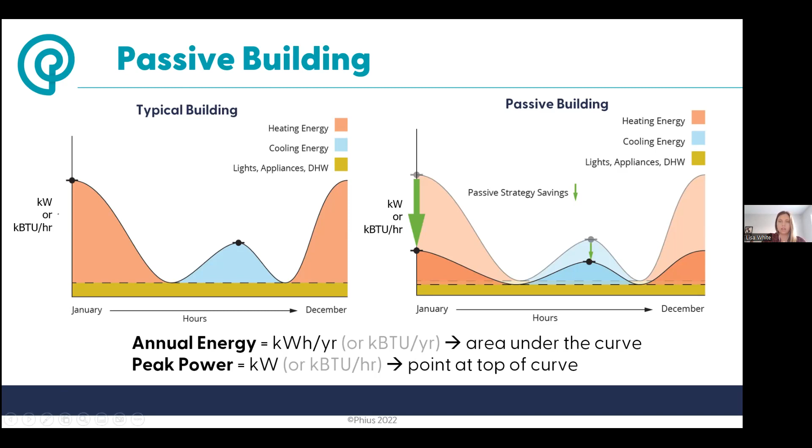So I understand there might be some utility people on, but most of us don't think about where our power comes from. We flip a light switch on and the power's there. And then if it goes out due to a storm or something, that's when we start thinking more about what is on the other end of that meter. So we're gonna start by talking a little bit about the grid and the current operation of the grid, where that's going, and then how buildings fit into this.

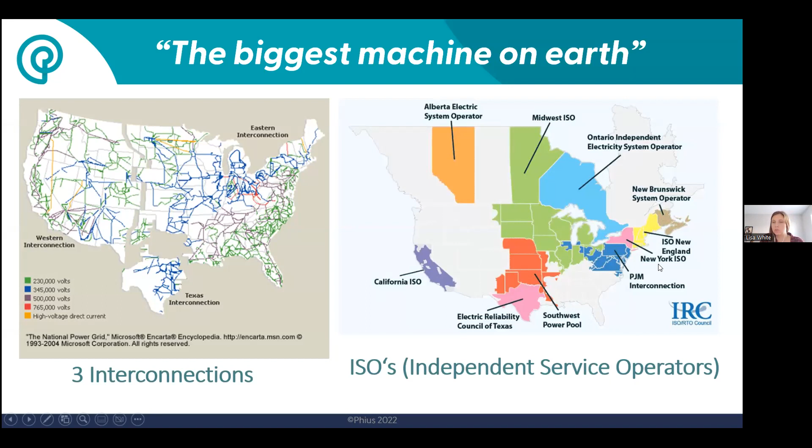So the grid, someone coined it to be the biggest machine on Earth. There's 3 different interconnects: the West, East, and Texas. They're not connected. They operate at the same frequency, but slightly off from one another. And different regions of the grid are operated by different ISOs, or independent system operators, or there's another name for some of the other regions that aren't ISOs. So up in Vermont, you guys are ISO New England.

It's a really complex process what's going on with the utility grid, but I think a lot of it's actually fairly antiquated in the way that it's working relative to the technology that we have today. So at a high level, the current electric grid infrastructure is you have generation, high voltage transmission, lower voltage distribution, and then a customer load at the other end. And it's unidirectional power flow, from generation to load.

And if the customer load increases, the power generation must also increase. This is just how it goes. The generation must be built in order to meet the customer load. They must have enough capacity, and it must be able to respond to continually supply power to these buildings.

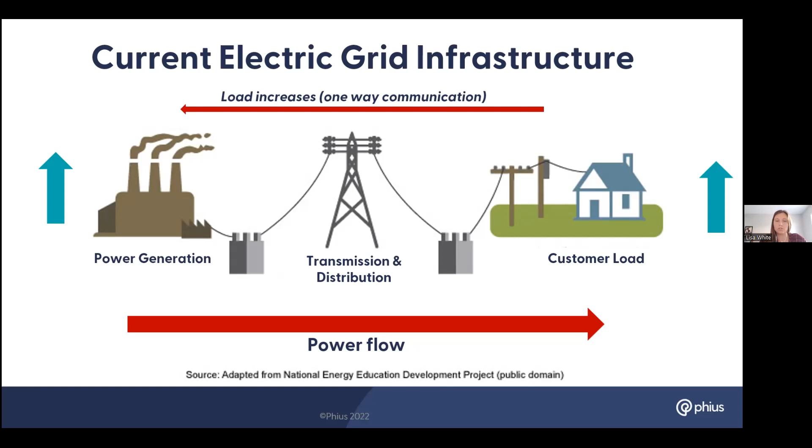And in terms of resources that we have on the grid, nationwide, we have about 35% natural gas as a fuel to create electricity, 23% coal, 20% nuclear, 15% renewables, and 7% hydropower. And we know that renewables will be the fastest growing source of electricity generation, or we hope, at least we at Phius hope, for greater decarbonization.

And the loads that the grid sees are fairly predictable. The load that the different ISOs, or really eGRID regions, need to balance are fairly predictable. So in winter, there's a base load, there's an intermediate load, kind of when the day starts, and then a peaking load, which in winter is just heating up buildings in the morning, and then that late afternoon, evening peak. And then in the summer, you have, again, a base load, an intermediate load, and then one peak in the middle of the day. And these loads are met with different types of resources, different generation resources.

So coal and nuclear and maybe some renewables are used to meet baseload. This is mostly because these resources are constrained to constant output. So it wants to be set and say, I'm delivering this amount of power and I cannot change that. Intermediate load is met by what is called load following resources. So some natural gas combined cycle, maybe some renewables. So when that load increases, that resource is increased to follow that load, right?

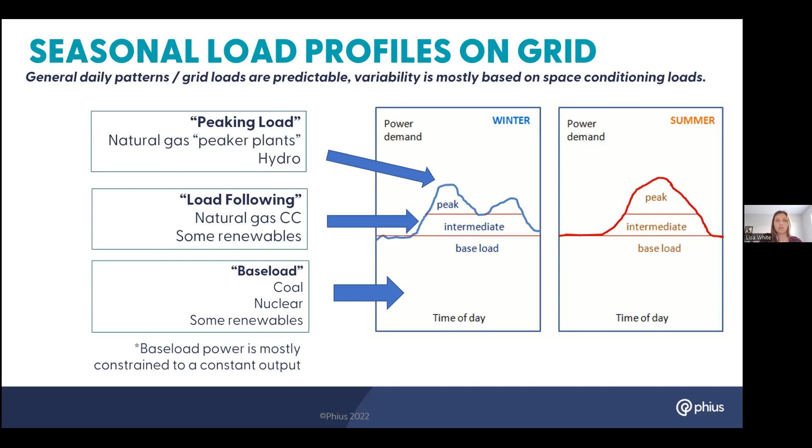And in terms of the capacity that we have in the US grid right now, there's about 2.5 to 3 times more generation capacity than what's used annually. And what that really means is if everything we had ran all out all the time, it would generate 2.5 to 3 times more energy than we actually need over the course of the year. And that's because of this peak. So the system has to be sized to meet that peak at that critical moment.

And with building design, I assume many on this call are related to building design or operation. We kind of understand this from the point of, let's say, a heating system size. You calculate a peak heat load based on one critical climate condition during the year, and then you also add some redundancy on top of that to make sure that load is met. But this is happening at the scale of the utility grid to make sure that peak load of the grid can be met.

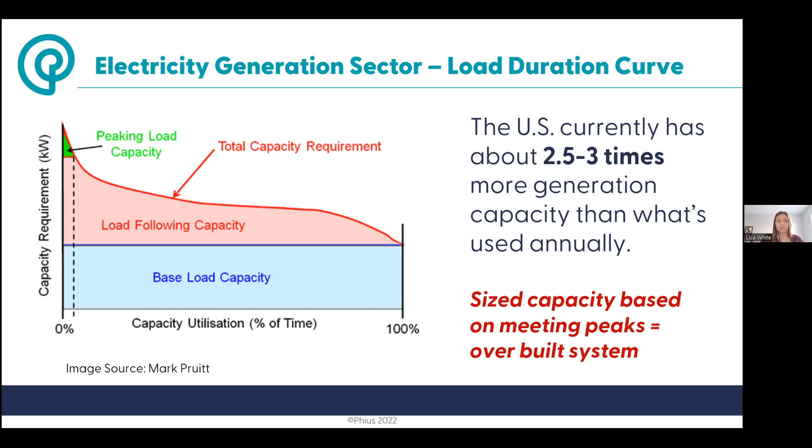And as the grid load increases over the course of the day, more and more expensive resources must be called upon, because the generation resources essentially bid into the power market at a certain price. So you start with the lowest cost and then increase over time. So that last kilowatt, or megawatt in this case, of power is the most expensive one.

And another way to look at this is on the right chart here, as the demand increases, as this vertical line goes to the right, the market price increases, the horizontal line. And it's not linear, right? After a certain point, that next resource might be more expensive. And that's when you get into these peaking plants and these really expensive resources that happen when the demand is really high.

And utility pricing, generally we see most residential customers see flat rate pricing. It's more of like an insurance policy almost, that you're not subject to the vulnerability of the actual cost of the market electricity. But real-time pricing is actually variable. As I'm sure many on this call understand, the actual pricing to deliver electricity at any moment is variable, though most consumers are paying a flat rate for it.

There are, I should say, a fair amount of markets that use time of use rates, or even in Chicago, you could say, I want to use the real-time pricing, but generally we see flat rates.

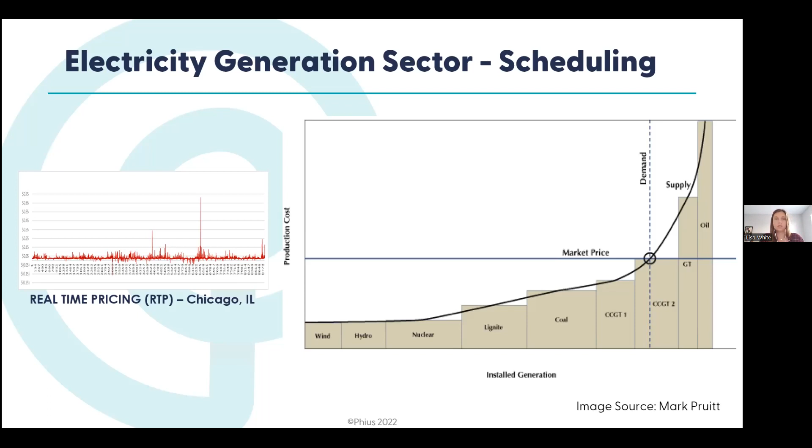And because every hour, every moment, the electricity being delivered to a certain region or a certain building is a different mix of generation resources, there's a different marginal carbon emissions associated with that, which means that next kilowatt hour delivered has a different emissions rate than a different hour, because it's a different grid mix, right? It's a different mix of resources, and every resource has its own carbon emissions associated with it.

But even with Phius, for those that are familiar, we just say every hour is the same. When we talk about energy, we look at annual energy, we multiply by a static source energy factor, and every hour is the same.

And if you look at what Phius is using right now for the 2050 grid electricity source energy factor, we're using 1.8, which is the average right here in the middle of the line. Whereas this is actually what the projected hourly source energy factor is for 2050, that kind of squiggly line across. So it's quite variable throughout the year, although again, a lot of our accounting methods look at a single flat rate.

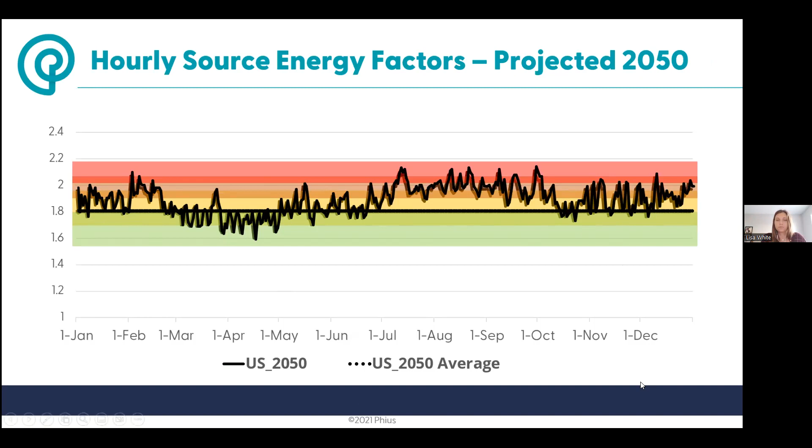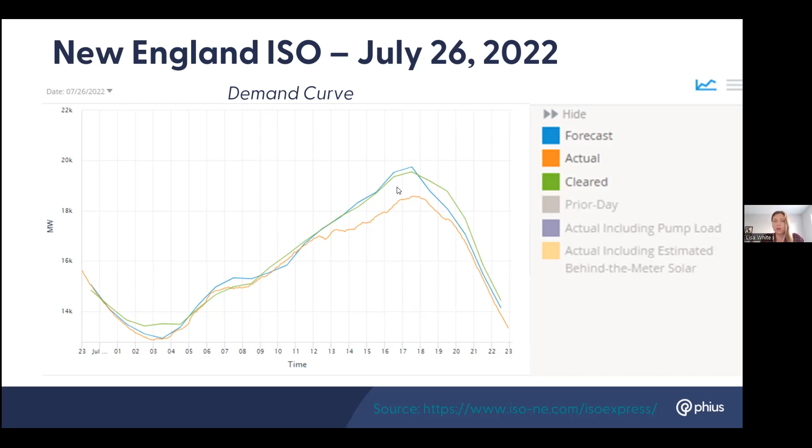And you can see the forecasted rate, the actual rate, and what cleared the market. This is a summer day, so you have the afternoon peak.

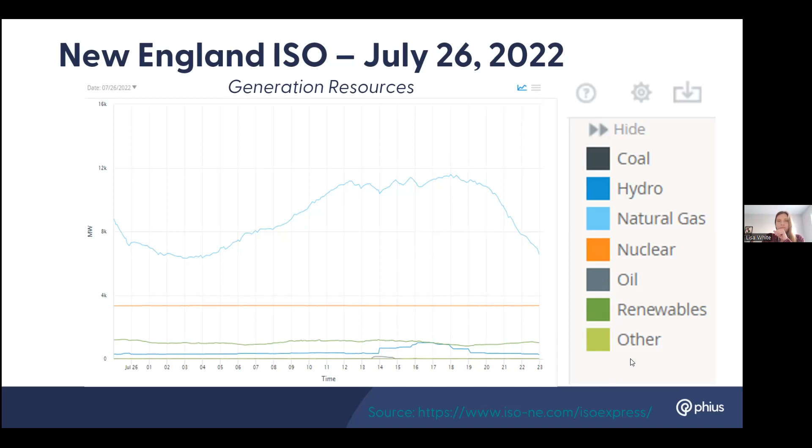So it's offsetting the energy use of this building. So the grid never actually saw that load. So they're estimating, but because it's behind the meter, there's no actual exchange of data with the utility to understand what that load was.

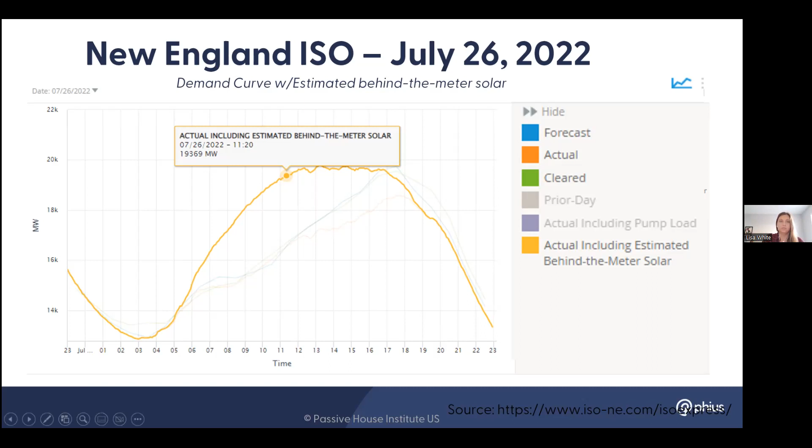And then digitalization. So the technology that we've experienced in the past couple of decades is being applied now to the electric grid, whereas the electric grid in many areas hasn't been updated in quite a while.

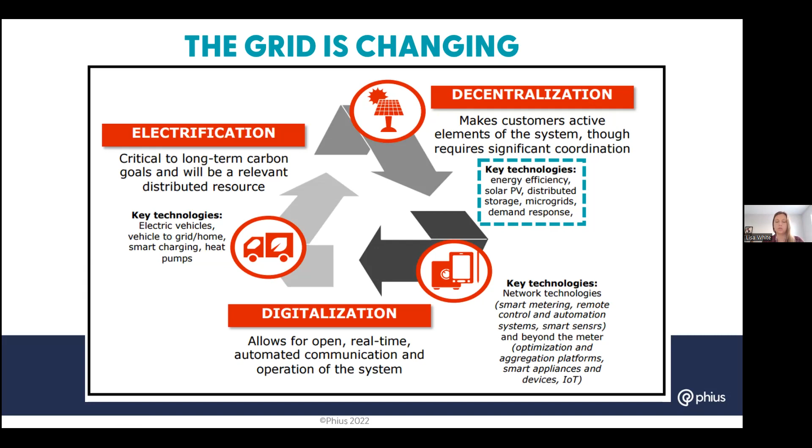And probably 10 years ago the duck curve came out, where it talks about the ramp, which I'll show. But this is happening day after day, where the ramping period, either ramping down or ramping up for the grid, is a challenge due to the limitation of the resources that are available to meet that load, whether it's ramping up to increase power output, or ramping down to turn down those resources.

The other big challenge that's happening is the transmission lines aren't upgraded quite sufficiently to carry the load. So if you have a central solar PV system, there's congestion on the lines.

There is a question, Lisa, if you want to answer it, from Andy: what is the shaded area on the last graph?

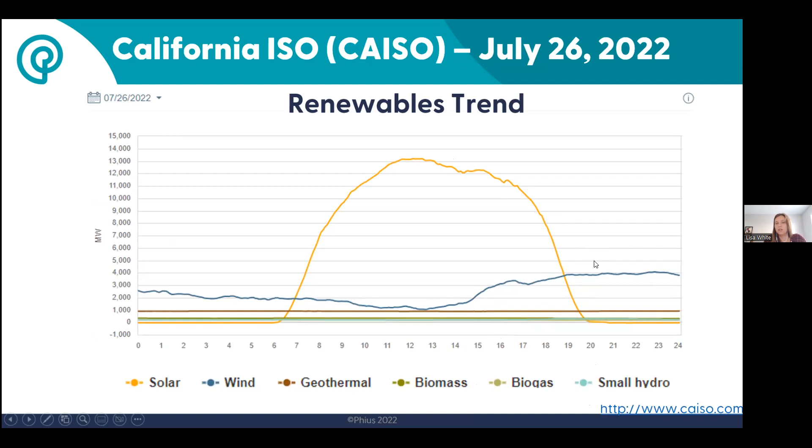Lisa is fighting a very bad cold. I'm sorry, I haven't tried to talk this long yet. So I wasn't quite sure. Just do whatever you can, no problem. Don't worry about it. No, it's no problem. I'll just keep muting if it's okay.

And then the other curtailment that's happening is due to mitigating system-wide oversupply. So there's a lot of excess energy being produced during those times. So it must be curtailed because it can't be used. It either can't get brought to the customer or it can't be used. So when you see negative electricity prices, this is one reason this occurs.

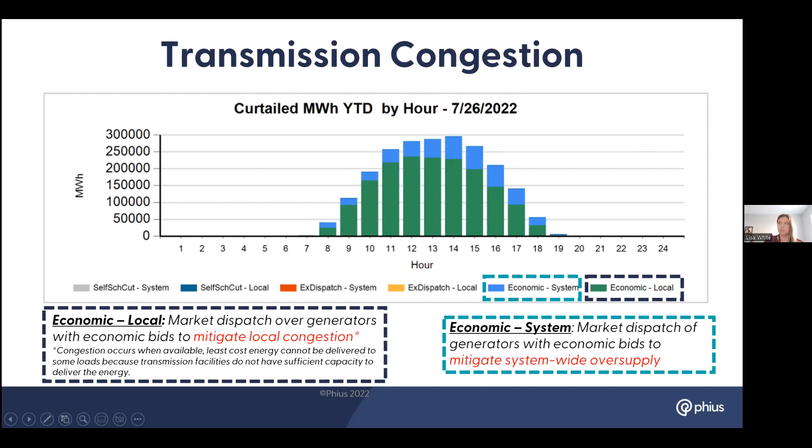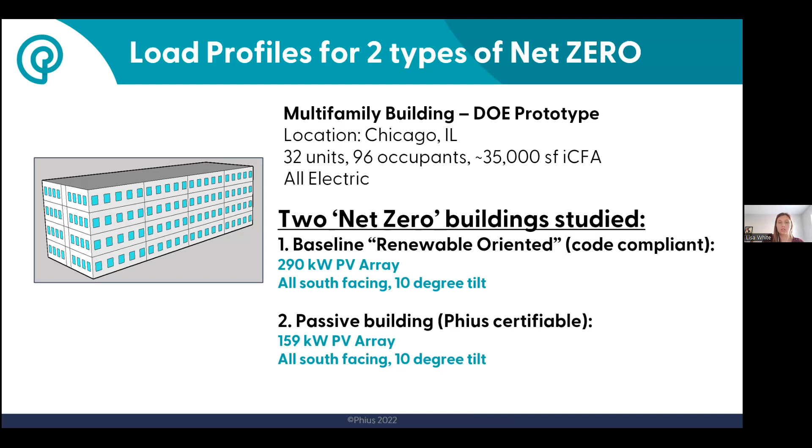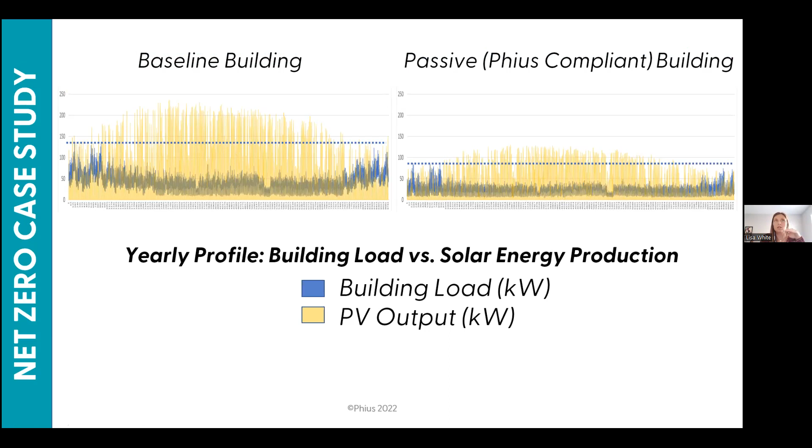And then if you look at ultimately the peak of that building, or what the grid capacity would be required for that building, you're looking at maybe around 130 kilowatts for the baseline versus maybe 80 for the Phius building. So remember, the peak defines the capacity, or ultimately the maximum power output of the generation needed to serve the building.

If you were to look at this in one other way, kind of spinning it around this chart, January to December, we're saying this building load of the baseline building is being offset by this yellow load. So the blue lines are being offset by the yellow. And same with the passive building, a little bit smaller of a blue, more condensed, lower loads, a little bit smaller yellow, right? But they're not identical.

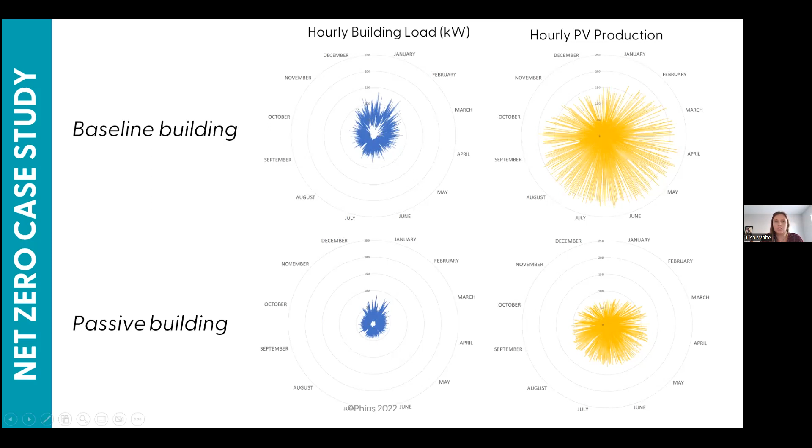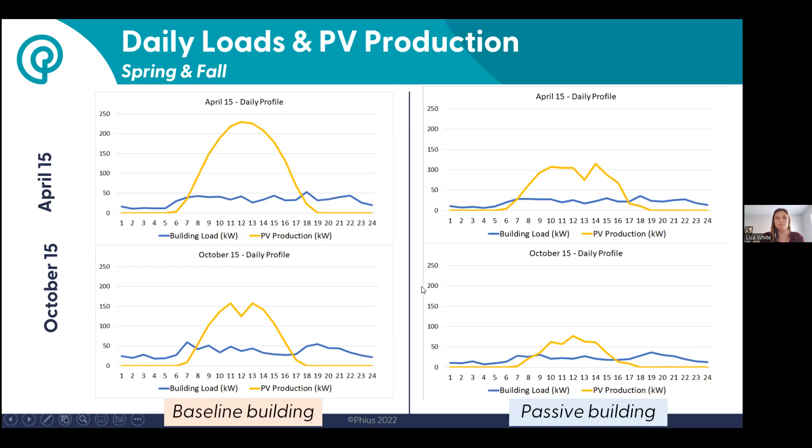So the mismatch between the two load profiles is lower because just less energy was used in the building, so less energy had to be produced to offset it over the course of the year. In the same case along the bottom in October. So what do we get out of that, right?

So just understanding that net zero buildings that rely solely on PV to offset their annual energy use, whether it's passive or not, you still need grid support when the sun's not out. That's basically it. Without energy storage, you still need grid support. So net zero is a great goal, but it's not the end goal. There's more that we can do. But still, if you consider the passive case, only half of the reliability from the grid had to be provided because it used half of the amount of energy.

So just thinking about the concept of net zero, it addresses how much. It's this amount of energy over a certain amount of time used and produced. Really, the total end metric could be net zero over an hourly or a minute basis, and maybe that accounting could be more correct. But right now we use annual. And on its own, that doesn't address two key concepts that help further reduce operational emissions and facilitate more renewable resources or grid decarbonization.

So that's really the goal of the Phius+ program, is to further reduce operational emissions, right, and allow for more renewable resources. So these other two key concepts are low loads. That's not baked into net zero, but it is baked into the Phius program. So if you start with Phius Core, Phius+, low peak loads taken care of, right? And that, again, helps further reduce operational emissions because we're keeping the peak down and facilitates more grid decarbonization. But it doesn't address timing of energy use.

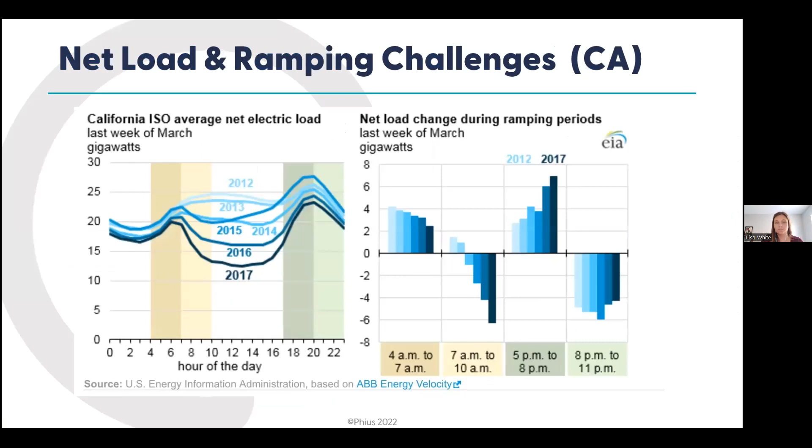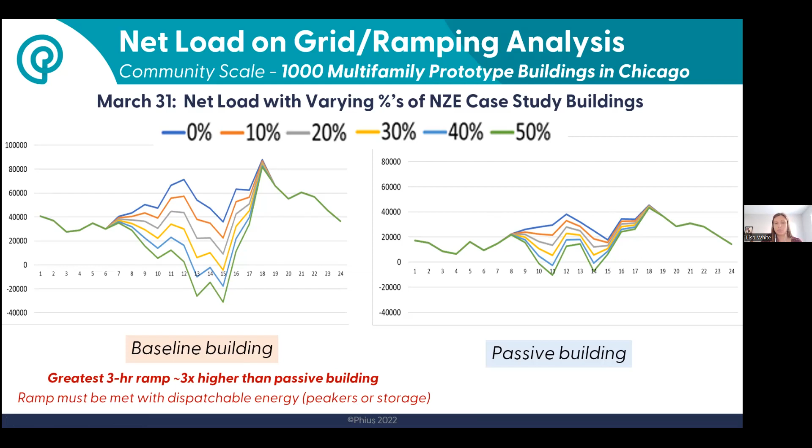So in the baseline building, you can see there's significantly more ramp, right? Because more PV was needed on an annual basis to get to net zero. And the loads in the building weren't quite as smooth or as flattened. So the passive building has a ramp that's 3 times less intense than the baseline building. Remember, this is the same size building, same climate, serving the same number of people, just with different design strategies. First, the passive building reduced peaks in total energy consumption by about 50%. And that alone helped minimize that ramp. So the passive buildings dampen that issue, but they don't fully eliminate it, right?

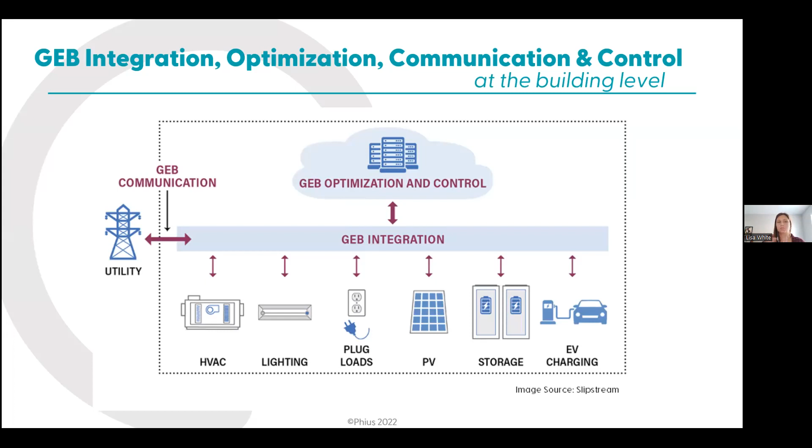So just a quick look at how this might work, a kind of schematic here. So the utility might have control over this grid interactive building in terms of some of the loads in the building, but they'd be defined through an optimization and control system. So the HVAC loads maybe could fluctuate, maybe lighting could dim, plug loads, maybe there's some critical versus non-critical, PV storage, when is it best to store versus dispatch power to the grid, and when is it best to EV charge, right? So trying to optimize this based on communication with the utility and the grid stress at that time.

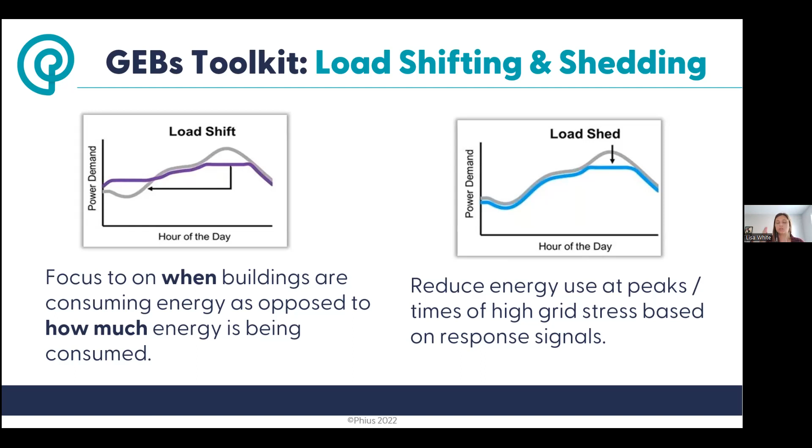And then load shedding is reducing energy at the peak. So this is just a load that doesn't have to happen and the building can shed it, or also demand response. And this is based on a grid signal or that peak happening at that time of day. So for this, I generally think of space conditioning loads or thermostat set points or lighting dimming, things like that.

So if we were to look at the grid scenario we looked at before, but look at it with GEB, grid interactive efficient buildings, and look at a time of high grid stress. So we still have the power flow happening from one end to the GEB customer load. The grid stress is high, so it sends a signal to the customer to reduce the load, and that's demand response. The customer can reduce the load, and then either the utility wouldn't have to go up to that next peaking plant, or that next generation resource, or the cost would just be reduced for the customer, right? The electricity price is about to get very high. It's best if you can reduce your load at the time. That's demand response.

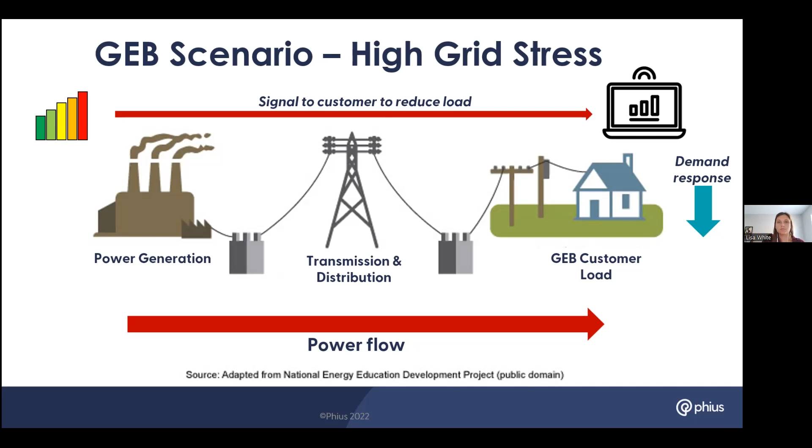The other scenario on the other side of the coin is if there's low grid emissions. So at that time I was talking about in California, high renewable penetration, let's assume there's enough transmission to get it to the customer. So there's power flow again going from the clean energy to the customer load, and the grid stress is low, but there's abundant renewable energy. So maybe the customer should actually increase their load right now if they want to: cheaper energy, lower emissions energy. And so maybe the demand response happens the other way.

Maybe the building is preconditioned. So maybe your space conditioning, say you're home in Vermont, happens in the morning, or overnight, whenever the renewable resource is available, or in the middle of the day, so that you can offset some of the heating needed later in the day. Or maybe you're charging your EV, something that can happen at any time, really, based on the signal from the grid. So you can either take on more power at certain times or shed more at other times.

And there's a big synergy between this grid interactive building concept and passive building. So passive building is kind of like the Yeti of buildings. If you think about the thermal enclosure, I don't know if anyone has a Yeti coffee cup or cooler, but it's amazing how long it can keep coffee warm or keep ice not melted. So the passive building is very resilient to changes in exterior temperatures.

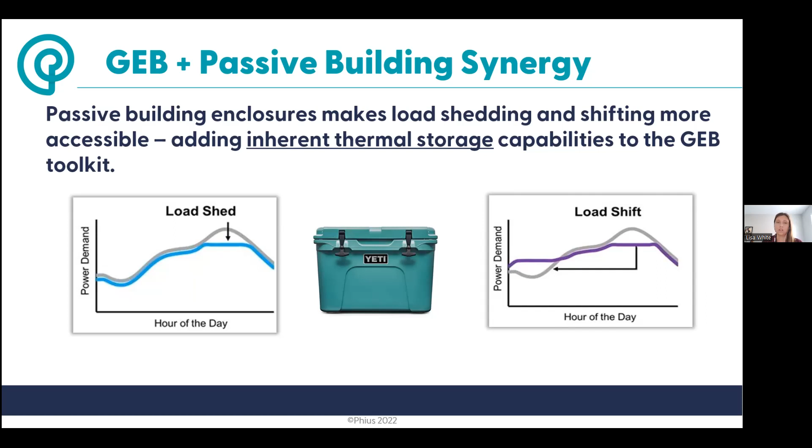And when we think about renewables in the future grid, I think a lot of people understand that storage is going to be a key part of it. But I think it's often ignored that buildings themselves can be thermal storage capacitors. We often think about large scale batteries, right? But there's all these untapped resources with the time constant of the building enclosure for these passive buildings that can be just as useful as electrical energy storage.

So Phius+GEB, I put it in the name, but it's not a real program, so I apologize if someone thought they were going to hear about a real program today. It's just kind of my dream, where you take the Phius concepts, the passive building concepts, but then think further. It might not need to be net zero, but you use Phius CORE, all the best practices of Phius passive building as a baseline.

And then maybe you think about how much load can the building shed? How much can it shift? How much can it take on excess renewable power? Maybe offset later. What are the critical loads of the building? How responsive is it? What are the generation and energy storage components? So it's more like a piece or a key knob in the future grid rather than another net zero program.

Apologies. Okay, getting into building electrification. I see the time. I'm gonna have to move a lot quicker. I didn't account for my water breaks.

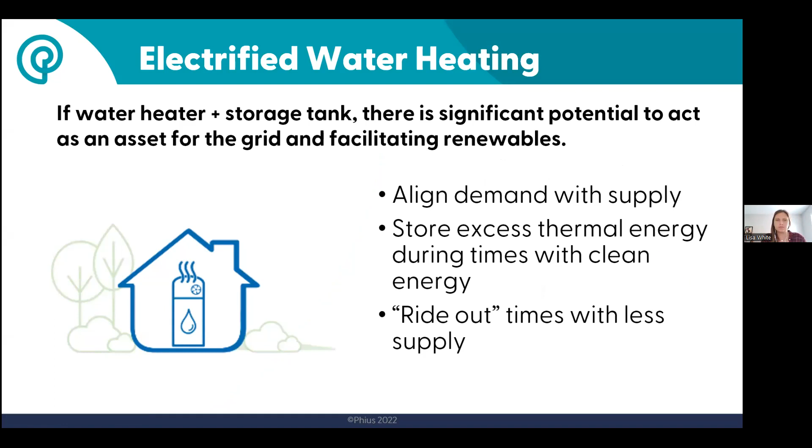So just quickly, water heating has a huge potential. An electrified water heater with a storage tank can act as an asset for the grid, in the same kind of thermal storage way that I just discussed. But I really want to talk about the passive building side.

So I mentioned that the peak is changing. Right now, the US grid peaks in the summer. And this is because the cooling systems are electric, right? So when the space conditioning loads are high, the grid peaks. And that peak is shifting to the winter. The grid peak that we talked about, the 2.5 to 3 times more capacity than we need, is all sized for that summer peak.

But we're going to start to electrify heating systems in buildings and shift the grid peak to the winter. It's going to be even higher than it is right now, all while we're trying to swap out fossil fuel based reliable resources for these intermittent renewables. So this peak changing is a really big deal.

So we're going to look at two flavors of buildings again: a typical code baseline building and a passive building, looking at a winter day load. We're going to say the typical building has a peak of 4 and the passive building has a peak load of 2.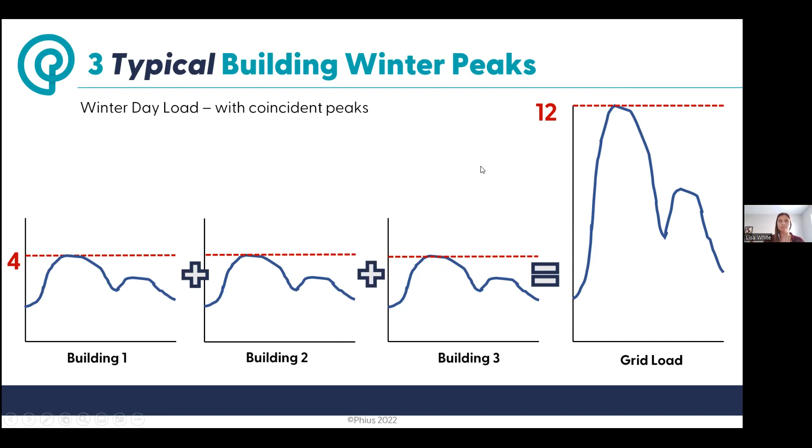So we're going to look at these kind of played out. So if we look at 3 of these typical buildings, coincident peak heat loads, their neighbors, let's say, the heating's happening all at the same time, the grid capacity required of the grid load is 12, right? 4 plus 4 plus 4 is 12. Now we make them passive. 2 plus 2 plus 2 is 6. So we've reduced the grid load by a factor of 2, right?

And now if we take the passive and we integrate this grid interactive building strategy using load shifting and smart technology, using the thermal storage enclosure, we can have the heat load happening at different times in the day. And now our grid load is 4, right? So just by implementing first passive to reduce the grid load and then shifting them around, we've reduced the capacity required to meet these 3 buildings' load by a factor of 3.

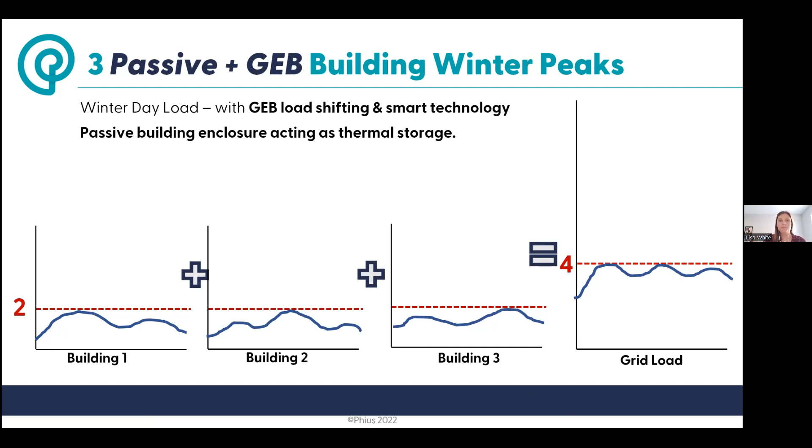So now we're getting to microgrids, and I'll try to get through this in the 10 minutes allotted here. So we keep looking at this unidirectional power flow chart: generation, transmission, distribution to load. Microgrids, I'm not an expert on this, but it's more of a mesh network where there's interchange and interconnections between buildings and the ability to exchange energy between buildings. At a high level, the key components are energy demand from buildings with grid enabled loads, so those GEB buildings, energy generation of some sort, storage of some sort. And then what's really critical is the microgrid energy manager optimization system.

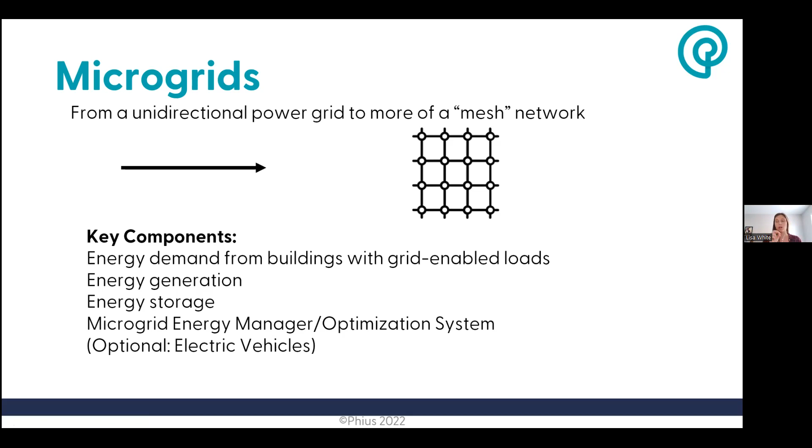So the microgrid manager, this optimizer, is really important. If you think about the supply side, you have your generation. If 1 kilowatt hour is produced, where does it go? If it's a time of low supply, it'll serve the most critical load in this microgrid, and that would be programmed into this manager. If it's a time of excess supply, maybe you store it or you charge another EV if they're not full. You shift a non-critical load of another building to use it. Maybe it powers something on, or maybe you condition a space past its set point. So if you know you need to heat the building, you heat it a little bit more at this time and then let that float later when less energy is available.

On the demand side, when a building adds a new load, how should it be met? So it also has to determine this. Is there renewable energy available for it? Is there storage you could dispatch from your microgrid? Is it a critical load? Does the building need it right now? Or does it come from the main utility grid? So there's a lot of complex things going on here that this microgrid manager must assess.

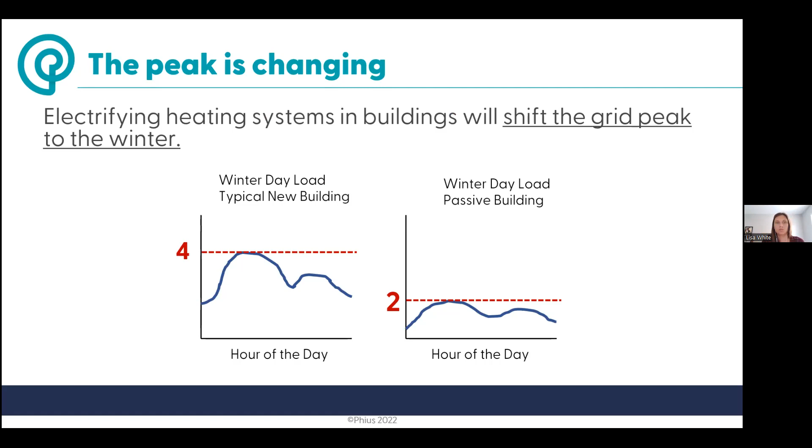So what about the winter peaks in this microgrid? We're going to look at the same 2 scenarios, the typical building and the passive building, the peak of 4 and the peak of 2, right? Knowing that this peak is shifting to winter, which determines the total capacity required by the grid. So we're going to look at a few different scenarios.

We have our baseline building with the peak of 4 in a typical centralized grid. Before, we were looking at 3 of them in line and we added them up; that's the coincident peak. Now we're looking at 9. So we had the peak of each baseline building in the central grid. It sees all these together, right? The coincident peak of these buildings is 4 times 9 houses, which is 36. So what if we took that baseline building and we added some shifting or shedding technique?

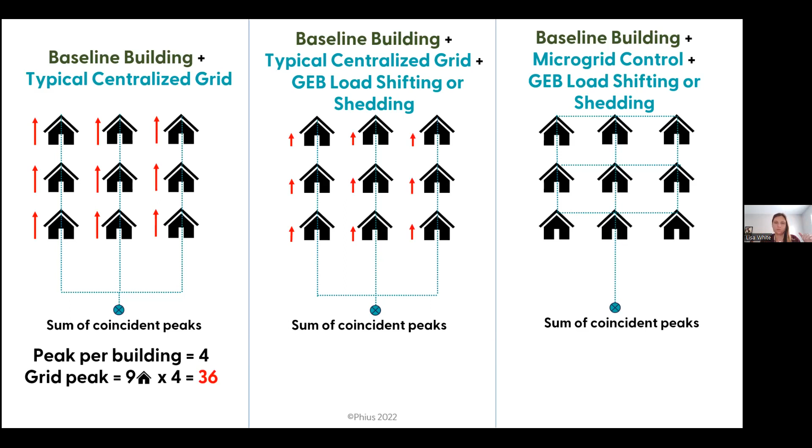Maybe it can shift the load to a different time of day or shed half the load and turn the thermostat back, things like that. So now let's say we can get about 50% out of that, reduce the peak in each building to 2, or 2 at least coincidentally. The peak per building is 2, 9 times 2 is 18.

And then what if we could take these buildings, use that shedding or shifting, so now we have a peak of 2, and then optimize when this load happens between the buildings. So now maybe only 3 buildings are experiencing that peak load at the same time. So the sum of the coincident peaks, the peak load of 2 per building that we got down to, is just 3 times 2, or 6.

And the main difference between the middle scenario and the microgrid scenario is that in just the middle load shedding scenario, there'd be a central grid signal that would say, hey, the stress on the grid is high, the price of electricity right now is high, reduce load, or it would be able to set your thermostat back.

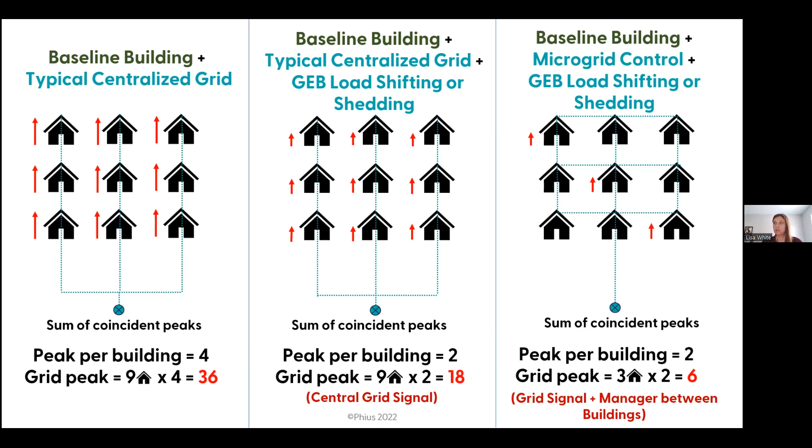On the far right scenario with the microgrid, there is that grid signal from the main utility, or maybe it's within the microgrid, but there's a manager between the buildings. So it knows when the peak of each building is happening. It can optimize so that those aren't happening at the same time. And what that can do is significantly reduce the capacity required to meet that peak once again.

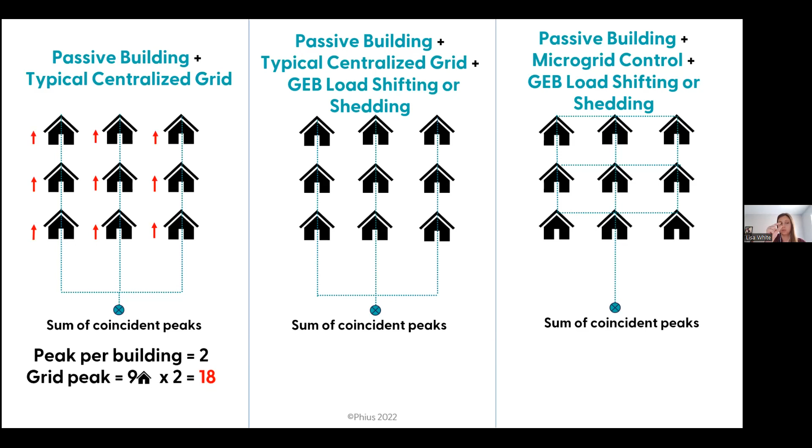And then take it one step further, you guys probably get where I'm going with this. First, if you make the building passive, so we took that peak load of 4 and we brought it down to 2. In a central grid, we have the peak per building of 2, 9 times 2 is 18. Now let's reduce that by a factor of 50% again, using the shifting and shedding techniques. So we have 9 buildings with a peak of 1, so grid peak's 9.

And then if we can control when this peak in the building is happening, knowing what the neighbors are doing, optimizing within this little pod, we have peak per building of 1, and the grid peak is 3 of these happening at once, with a grid peak of 3.

So just going from baseline, with the typical centralized grid peak is 36. We implement passive building to bring down the load by 50%, implement the load shifting and shedding another 50%, and then microgrid control to optimize between the buildings. And in this ideal scenario, what we've done is reduce the grid capacity required by a factor of 12 for the same set of 9 buildings.

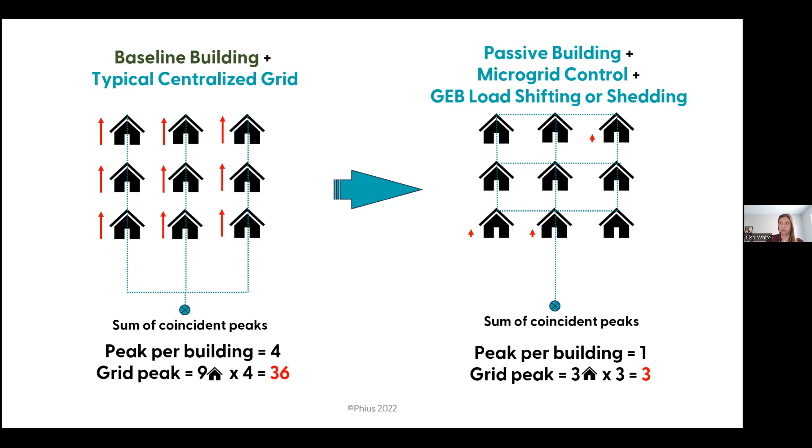Right, and I know this is an idealistic scenario, but there is something to what's happening here. And if you remember that the grid peak is what directly correlates with the capacity required to meet the load of these buildings. So if you think about the cost of the generation capacity and storage required to operate the buildings on the left versus the right, you can think some of that cost from the buildings on the left could go into making the buildings on the right more efficient, controlled, and that would directly pay off.

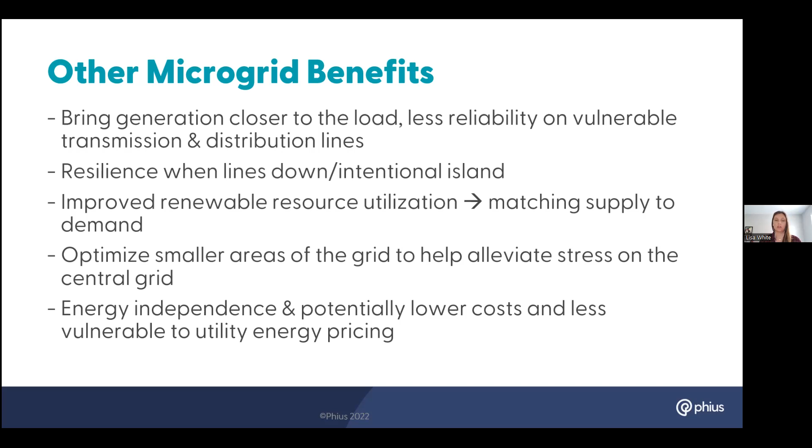And one I'm really excited about is energy independence and lower costs and less vulnerability to utility energy pricing, but also not just utility energy pricing, but energy pricing worldwide. Providing energy independence, let's say, to affordable communities, or less vulnerability to know what your utility bill might be, or maybe just self-sustaining little communities that can operate without the external sources.

Okay, solutions. I got 2 minutes. I'll be fast. Think about optimization at each level. So this is what I'm getting into, kind of the synergies.

So you have passive building reduces the load, the demand, and the renewable supply required to meet that demand. Then you have GEB, the grid interactive building, enables that demand to align with when supply is available. And then the microgrid level optimizes the supply and demand, maximizing use of that infrastructure, that generation capacity and storage, and in my mind, minimizes emissions.

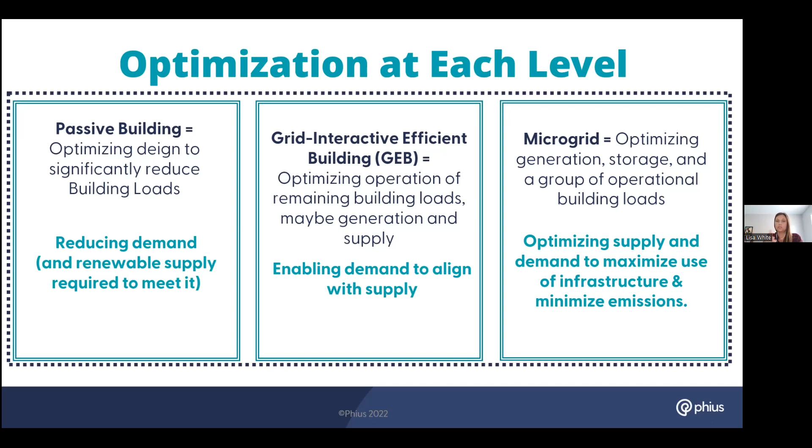I should mention that not all microgrids are set out to minimize emissions. Most of them, or a lot of them, are for security, energy independence, financial purposes. But I think there's a strong use case for them to minimize emissions. So all of these together are kind of tapping into each level of that synergy to reduce and optimize grid decarbonization. I'm gonna skip this one for the sake of time.

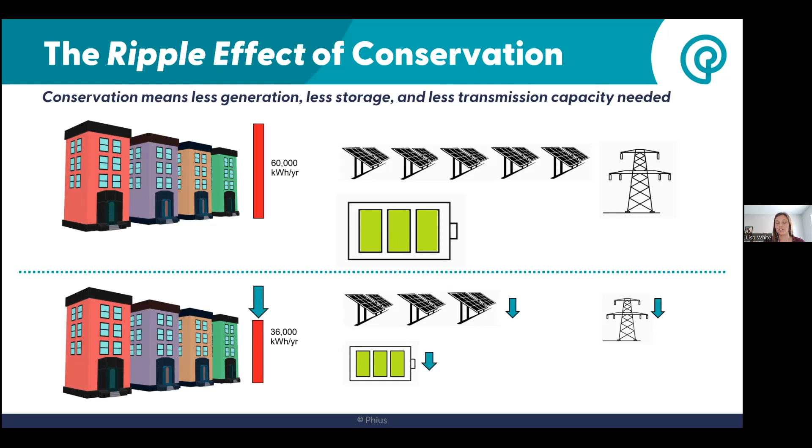If you first reduce the building load by 40%, you now need 40% less renewable energy production or PV, 40% less battery capacity, and 40% less capacity on the transmission wires. So if we think beyond the building, there is so much more ripple through the entire system of conserving that energy at one end that is generally not accounted for when considering how far to go with building energy conservation. And that brings me to the end, and sorry for going over by a minute.